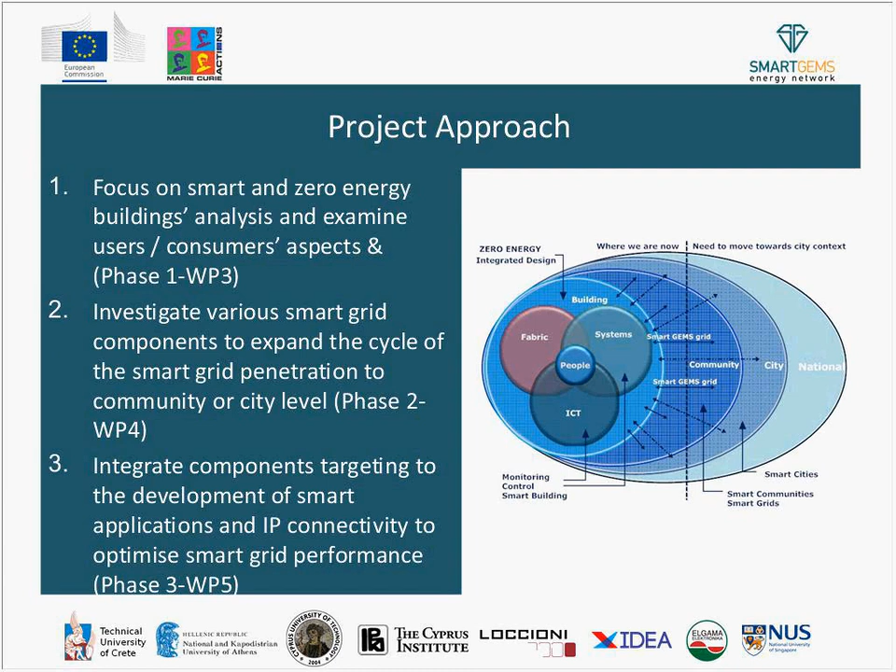Okay, so the contents of the presentation concern the development of smart and zero energy building protocols for Europe, with the objectives: the analysis and identification of three major problems of the built environment, which are the energy consumption, the energy poverty, and the local climate change, and the synergies between them; a roadmap involving future quantitative and qualitative targets; investigating the major technological, economic, and social forces and policies to identify the links, the synergies, the impacts, and the interrelated nature and characteristics of these three sectors, and the benefits for society, including the impact on the economy, employment, the environment, and health; and, of course, a list of conclusions.

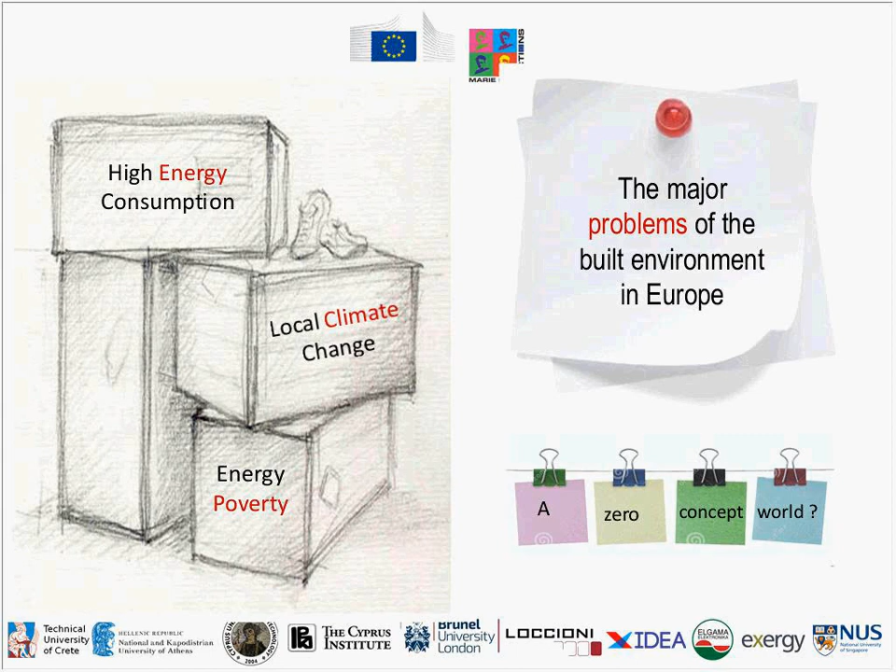So concerning the development of smart and nearly zero energy protocols for Europe, the three major problems, as we mentioned before, are the high energy consumption, the local climate change, and the energy poverty. Just a few words about the situation: buildings consume almost 9 petawatt-hours and represent 41% of the total energy consumption. The total European building stock is close to 24 billion square meters, and almost 75% of them are residential buildings with an average floor space close to 87 square meters per dwelling, while the rest is tertiary buildings. Almost 27% of the total energy consumption in Europe is spent by residential buildings, while the rest, 14%, is consumed by the tertiary sector.

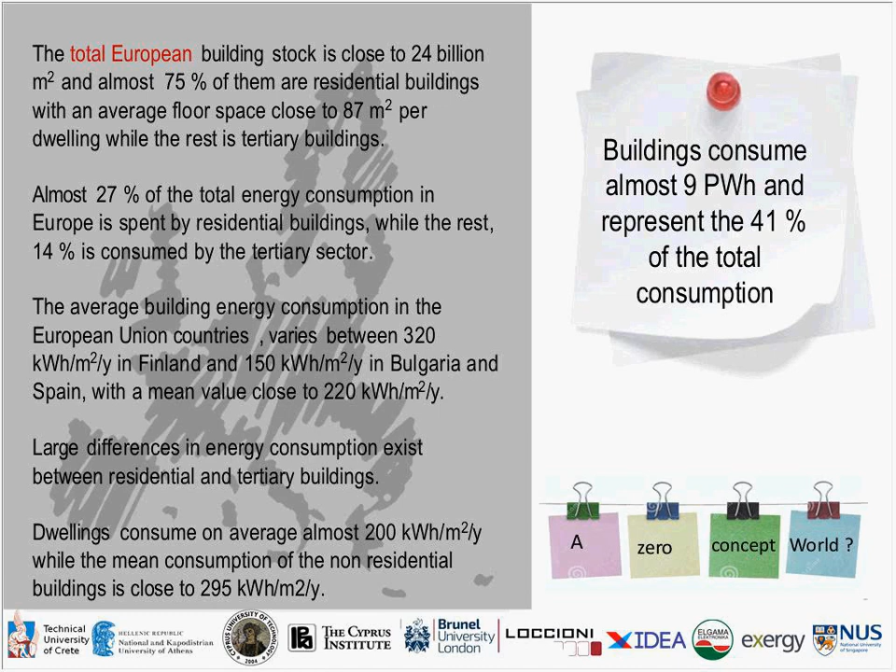The average building energy consumption in the European Union countries varies between 320 kilowatt-hours per square meter yearly in Finland and 150 kilowatt-hours per square meter per year in Bulgaria and Spain, while the mean value is close to 220 kilowatt-hours per square meter per year. So there are large differences in the energy consumption between residential and tertiary buildings. Dwellings consume on average almost 200 kilowatt-hours per square meter yearly, while the mean consumption of non-residential buildings is close to 295 kilowatt-hours per square meter per year.

The energy consumption in tertiary buildings is increasing constantly. The energy consumption of this sector has had a constant increase during the last 30 years. The increase rate is 1.1% for the years between 2010 and 2020, and this increase of energy demand is because of the evolution of the services sector, which increased by 1.3% per year.

Of course, services will be responsible for a major percentage of the additional energy to be consumed by tertiary buildings between 2000 and 2030. Trade and office buildings are the largest energy consumers, each accounting for about 26% of the global consumption for this kind of building, while space heating seems to be the end use presenting the highest energy consumption.

And energy spent for heating presents, let's say, a constant decrease over time, and this is a result of important energy conservation measures applied in tertiary buildings, and this is something which is rather optimistic.

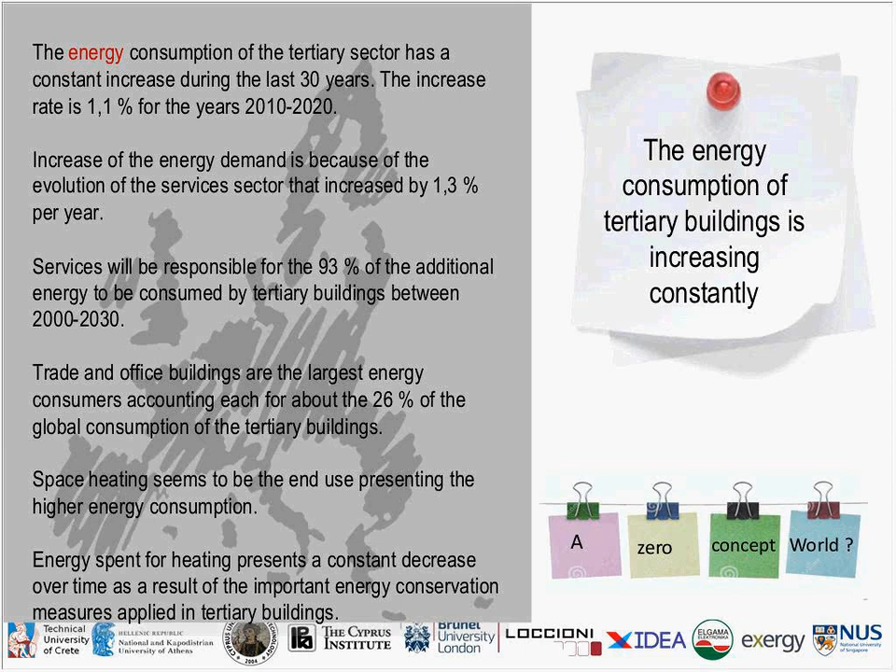So the energy consumption of residential buildings is increasing constantly, despite the strict legislative framework and the significant improvement of energy efficiency. The energy consumption of residential buildings between 1990 and 2020 has increased by 14%. The electricity used increased by 60% because of the very rapid penetration of

electronic appliances and services, and the final energy consumption in the residential sector in the European Union peaked in 2010, while there was a slight reduction, while the corresponding consumption for the year 1990 was lower, let's say.

So this increase of energy consumption is mainly attributed to various economic, social, political, and technical reasons, and this is, of course, mainly due to the increase of the number of households and the increase of the occupied space per person. So the energy consumption for heating is decreasing constantly.

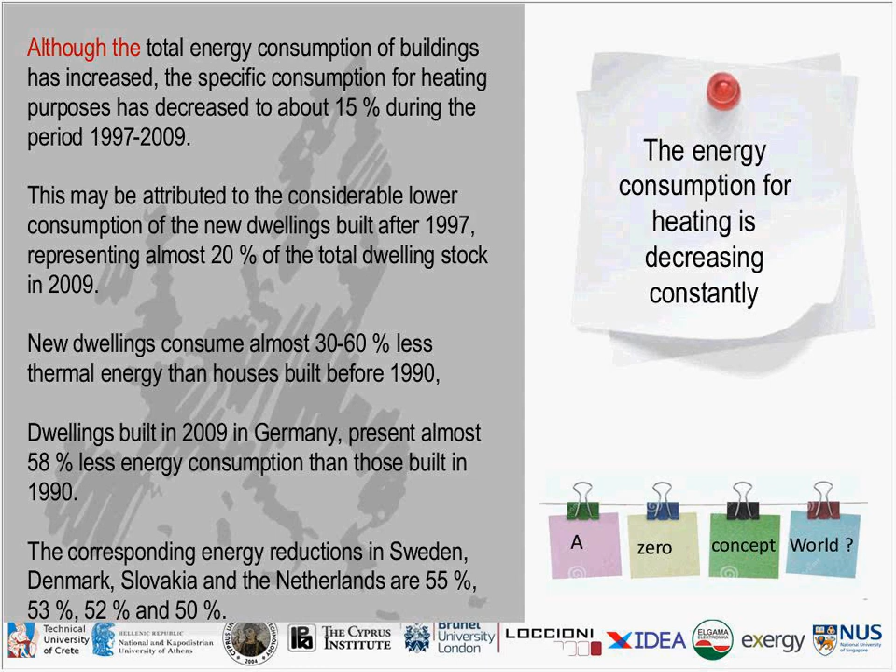The new dwellings consume almost 30 to 60% less thermal energy than houses built before 1990. Let's say dwellings built in 2009 in Germany present almost 58% less energy consumption than those built in 1990. And the corresponding energy reductions in Sweden, Denmark, Slovakia, and the Netherlands are between 55% and 50%.

The impact of the economy on energy consumption in buildings: the energy consumption in the building sector is subject to significant economic, environmental, and social factors and perturbations. Past and present experience demonstrate that this is an extremely sensitive sector which presents high variability with economic and environmental variations. Financial problems oblige part of the population to consume less energy and satisfy only part of their needs.

And it is characteristic that during the financial crisis of 2007 to 2012, the energy consumption of residential buildings decreased by 4%, while in countries with deeper economic problems like Portugal, Slovakia, or Ireland, the decrease was even more. It was 16, 22, and 22% respectively.

And it is characteristic that because of these serious economic problems, in Greece the consumption of heating oil was reduced by 68.7% in just one year. There were many residential buildings in Greece where during winter time most parts of the buildings did not have heating at all because they could not pay for the heating oil.

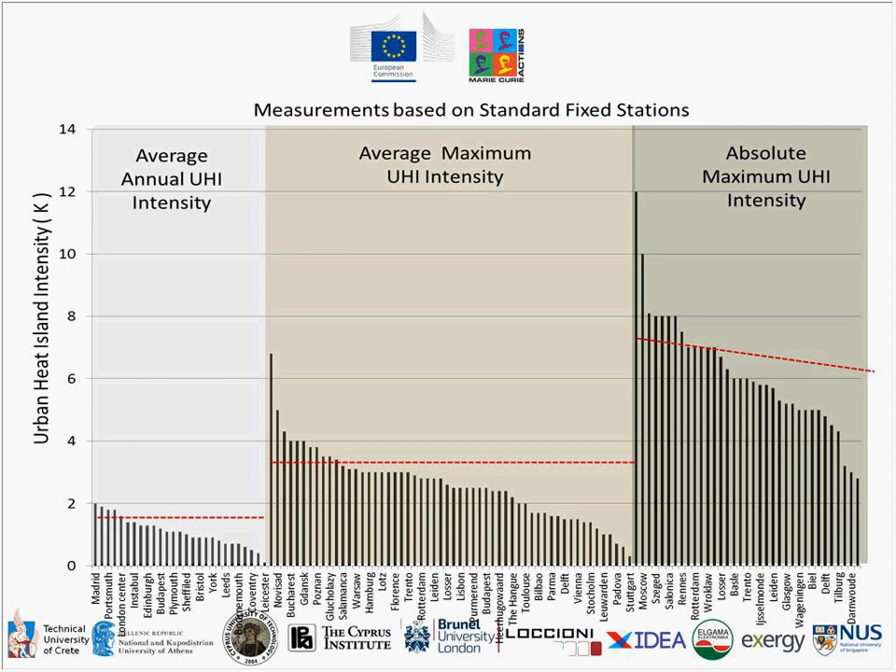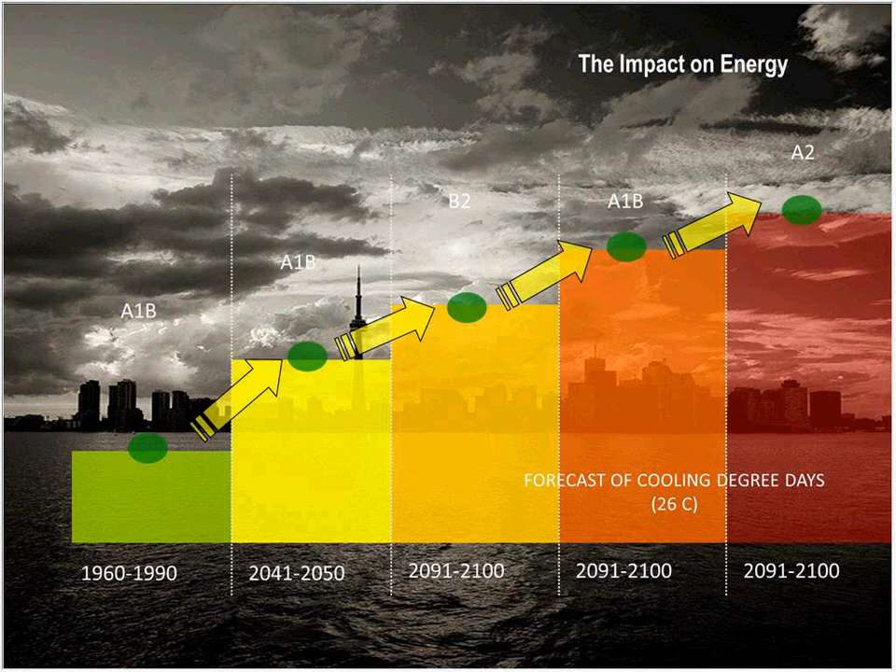So we can see important values here of the urban heat island intensity levels. With different scenarios that were estimated, we can see a forecast of cooling degree days at a level of 26 Celsius, and the trends on the impact of energy between 1960 and 2100, which shows a very clear and very important increase.

These studies have concluded that households with low socioeconomic status, living in poor houses, of course face a much higher heat-related excess mortality. And despite the progress that has been achieved during the last years, there is still a very high number of excess winter deaths because of the low indoor temperatures during the winter period.

There is a study that has reported, and I can distribute the related publications to this, and of course the related publication for this presentation, that there are from 30,000 up to 60,000 excess winter deaths annually in the UK because of cold homes, while mortality rates vary also as a function of the housing quality.

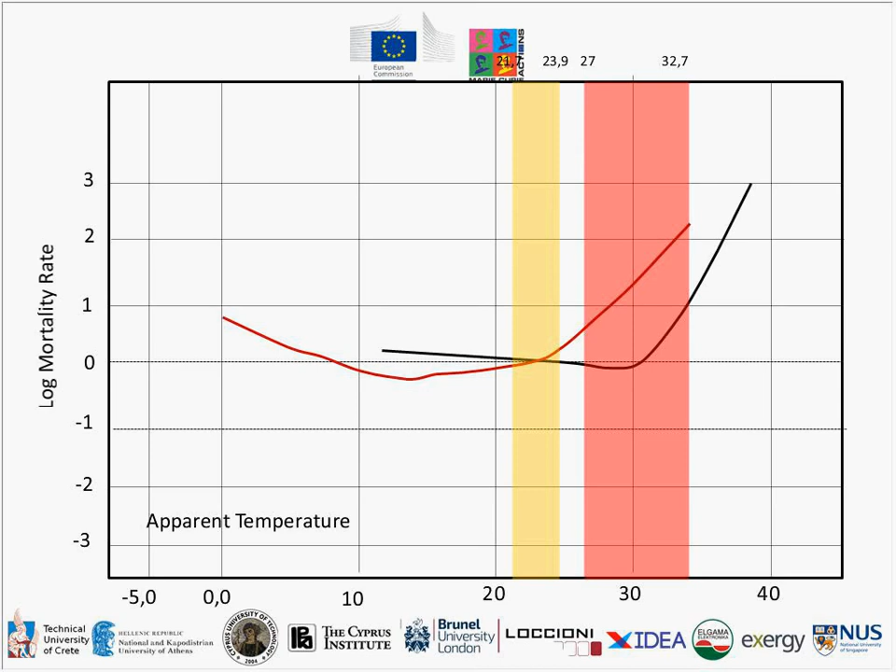And this can be related to the general threat for Europe concerning energy poverty. Energy poverty, with a rough definition, is the situation in which a household lacks a socially and materially necessitated level of energy services in the home, or in much simpler words, when one cannot pay the bills for the essential services for lighting or for heating of the house.

It is a problem of over 150 million Europeans, who cannot afford to pay the bills and maintain comfortable standards. And this is particularly valid for the citizens of states with a GDP below the EU average, where over 30% of the population face energy poverty.

This fact has a very serious impact on the quality of life of the citizens, affecting indoor comfort conditions, social attainment, and health. And it is a result of combined factors like insufficient family income, the poor quality and small size of the house, and possibly high energy prices, while other demographic drivers may play an important role.

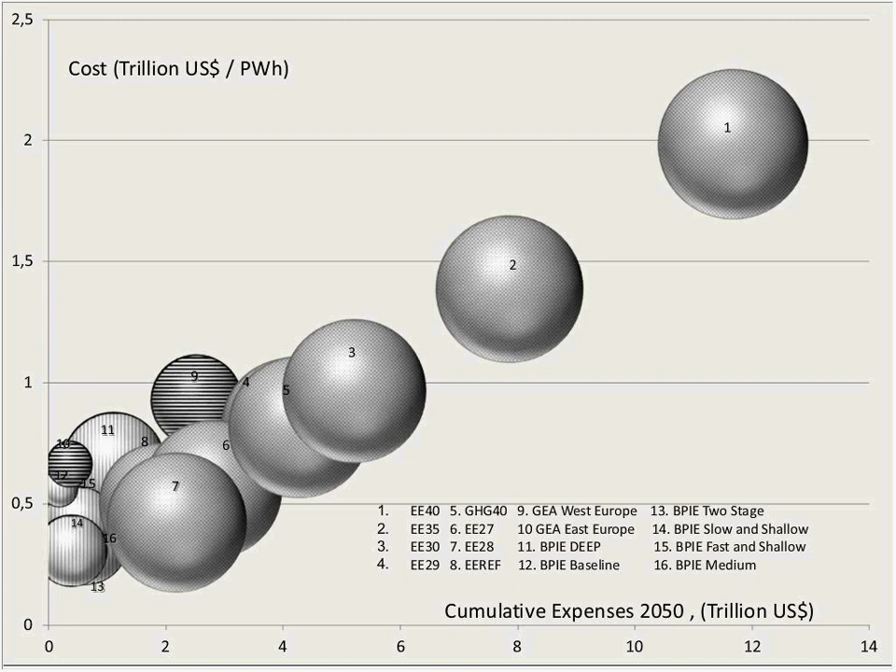This figure reports the foreseen cumulative investment costs until 2050 as a function of the achieved energy conservation, which is represented by the width of the circle, and the calculated investment cost per petawatt hour of energy conservation. And this is the cost in trillion USD per petawatt hour. And this is a diagram of cost similar to the previous one for energy conservation.

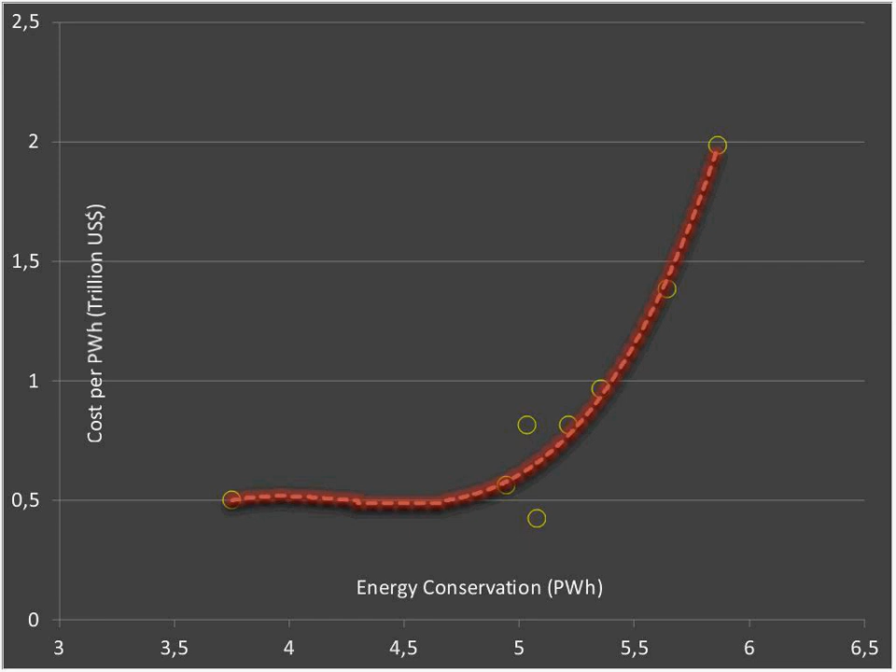The cumulative investments to almost minimize the energy consumption of the building sector in Europe by 2050 should be between 14.5 and 23.6 trillion euros. The CO2 emissions of the residential sector in 2050 will be reduced by 90.3% compared to 2005, while the corresponding decrease of the tertiary sector is close to 87.7%.

The application of energy efficiency measures has a positive effect, of course, on employment, and the number of additional full-time jobs created in Europe per 1 million euros invested varies between 6.4 and 39, with an average value close to 18.9 jobs per million euros invested.

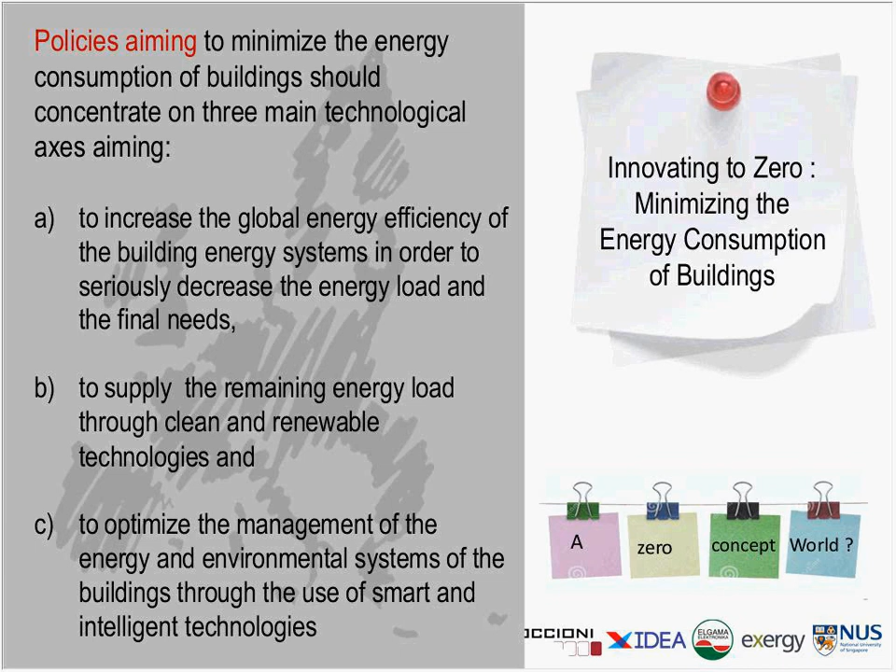Intensive research has permitted to develop technologies that help to mitigate and minimize the amplitude of the local climate change. Among the most promising technologies are those aiming to increase the albedo of cities: highly reflective materials used in roofs and/or in pavements in order to reflect the solar radiation and avoid the absorption of solar heat, technologies known as cool roofs and cool pavements, respectively.

A variety of these highly advanced reflective coatings and materials has been developed, presenting very high reflectivity in the solar spectrum together with a high emissivity value. Cool roof systems are extensively used around the world, and their capacity to mitigate the urban heat island is well documented.

What we can see here is the calculated financial investments to install the proposed cool roofs and pavements in each considered city, in different cities. The total estimated cost to implement cool roofs in the selected European cities as an average is close to 22.2 billion euros.

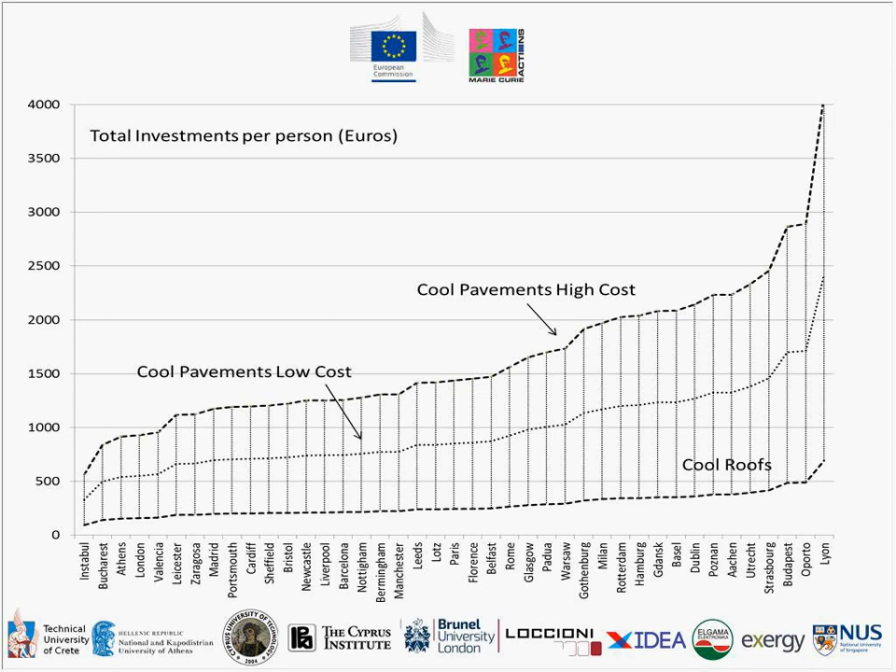And it is evident that the calculated cost per person, of course, varies as a function of the considered total area of interventions and the population of the selected cities. Considering the policy or action of mitigating the urban heat island, we can see in this table some information considering the required investments, the energy reduction, the full-time jobs annually created, and some other benefits.

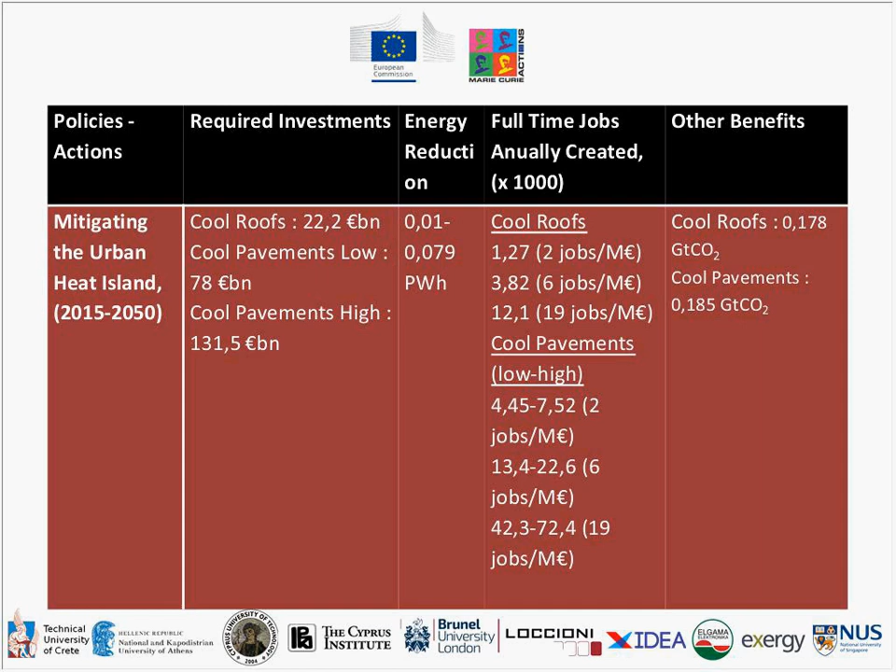Energy rehabilitation of the homes occupied by the lowest income households is the most efficient policy in order to fight energy poverty and to protect the vulnerable population. A deep retrofitting of the building stock used by the energy poor in Europe could have very significant social, financial, and environmental advantages. To estimate the possible benefits from such a policy, the necessary investments to minimize their energy consumption as well as the existing housing conditions have to be known, or at least estimated.

Given that energy poverty is not approached in a common way in Europe, and at this time there are some actions that try to present it or even to define it in a homogeneous way, there are divergent assessments about the total amount of the energy poor.

So here, in this figure, what is presented is the calculated investment cost considering different populations of energy poor, 50, 125, and 150 million energy poor, for all 17 different scenarios of refurbishment cost, presented with different countries, different investments and different remarks for each scenario.

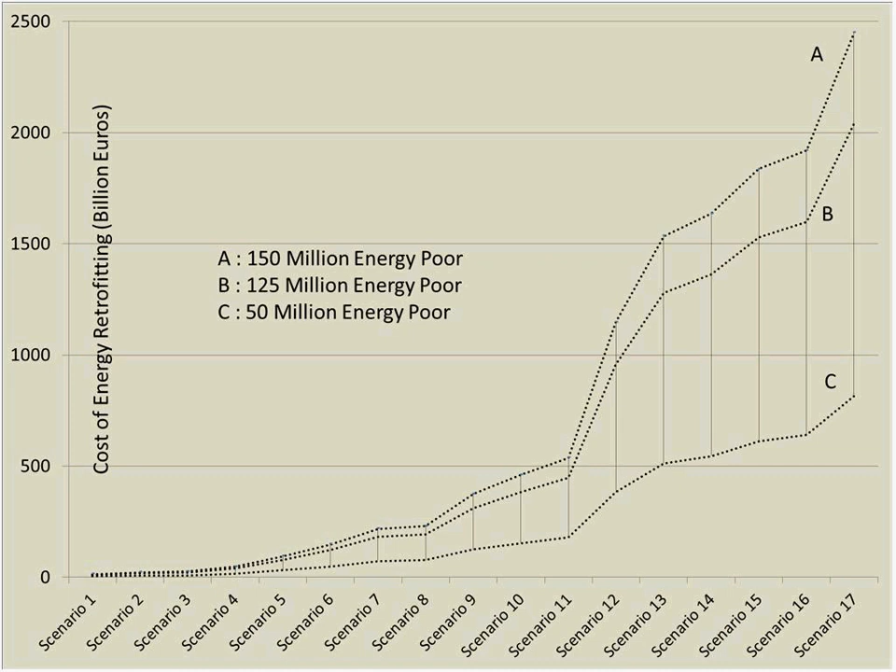High energy consumption of the building sector, local climate change, and energy poverty are the major drivers and the major problems of the built environment in Europe. The three sectors are strongly related with each other and present very significant synergies and trade-offs. Existing policies aiming to reduce the energy consumption of buildings usually underestimate the importance and the impact of local and global climate change, as well as the technical, social, and economic implications related to energy poverty.

And, of course, a failure to consider all these issues in an integrated and holistic way may inevitably result in higher consumption and in deterioration of the social and economic level. Innovating to zero the built environment of Europe assumes a minimization of the energy consumption of buildings, eradication of energy poverty, and mitigation of the urban heat island and local climate change.